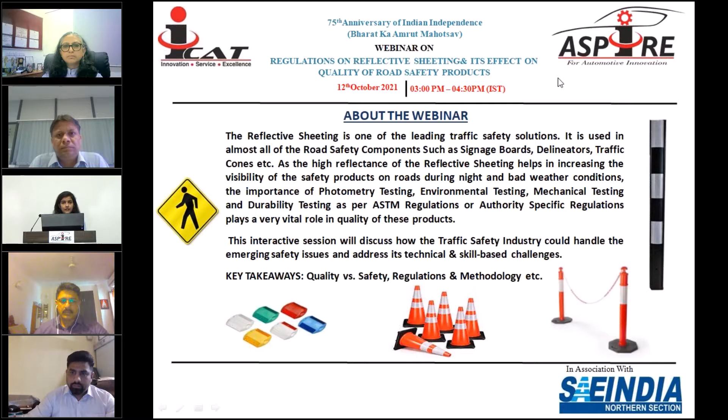Thank you, Astha. Thank you so much. Distinguished speakers, colleagues from the automotive industry, traffic safety industry, ICATians, ladies and gentlemen, a very good afternoon to all of you. It gives me immense pleasure to welcome you on this webinar on regulations on reflective sheeting and its effect on quality of road safety products.

Conventionally, we used to organize physical seminars and conferences, which gave us an opportunity to interact with all the experts and stakeholders in person and share our experiences. But due to COVID-19, virtual connectivity has become the norm of the day, and we have been trying to bridge the gap that the absence of physical presence had brought in through virtual connects. So we are having a series of webinars.

So today's webinar is on a theme which is very pertinent for India and for the Indian population, for road users, as to the regulations on reflective sheetings and their effect on quality of road safety products. We are aware that in financial year 2020, the length of road construction across India was about 24 kilometers a day.

And this has now gone up to being ramped up to 28 kilometers a day. So we have consecutively, continuously increasing construction of roads.

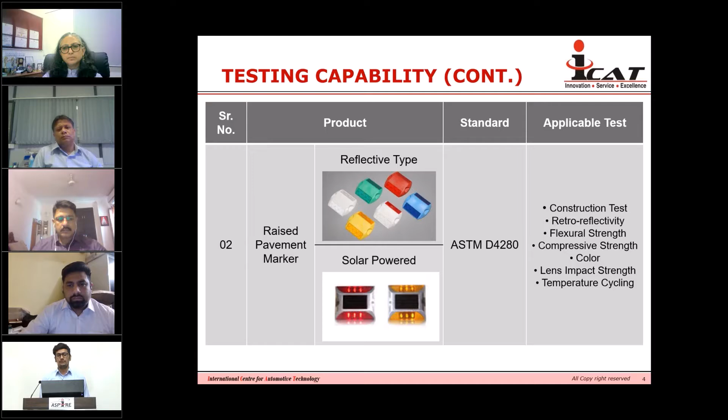The second product is raised pavement marker, RPM, which is of two types: reflective type and solar powered. The standard for this is ASTM D4280, and the applicable tests are retroreflective effectiveness, compressive strength, color, lens impact strength, temperature cycle, etc.

The third one is flexible median marker and delineator. The reference standard for this product is IRC 79, and the various tests as per this standard are dimension test, measurement of reflectivity, powder coating thickness, etc.

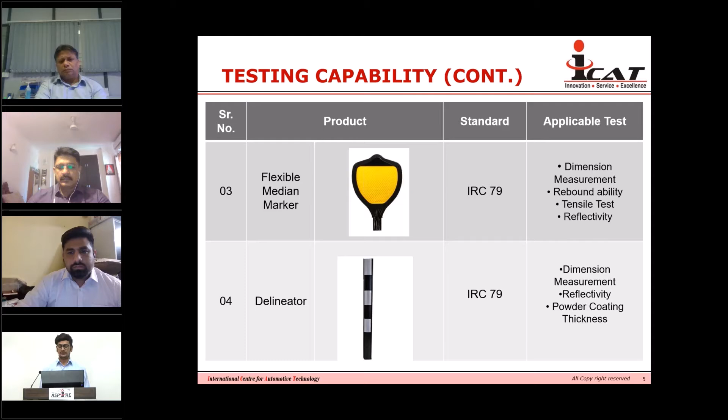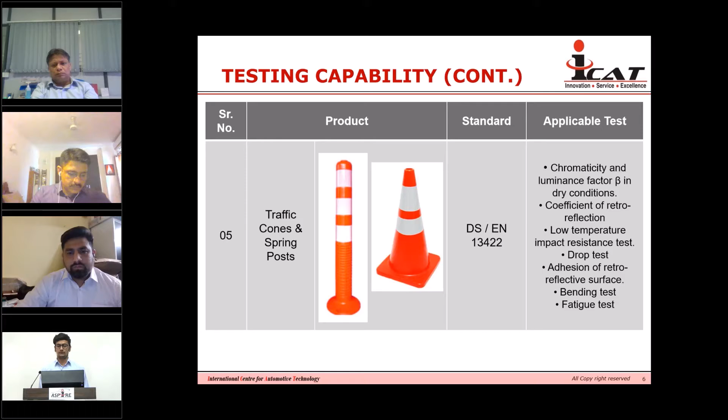The next product is traffic cones and spring posts. The reference standard for this component is EN 13422, and the different tests applicable as per this standard are coefficient of reflection, low temperature, impact resistance, adhesion of retroreflective surface, bending test, fatigue test, etc.

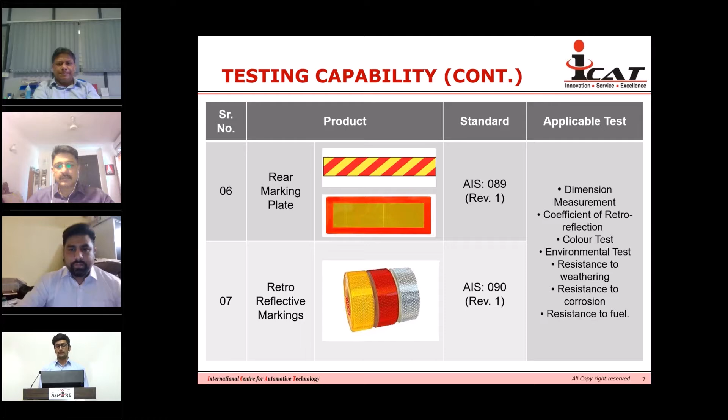We are also capable of testing rear marking plates and retroreflective markings, which are as per standards AIS 089 and AIS 090. The main tests applicable for this standard are dimension test, coefficient of retroreflection, color test, environmental test, resistance to weathering, resistance to corrosion, resistance to fuel, etc.

We are also capable of testing the high security registration plate lamp, which is as per standard AIS 159. The various tests applicable as per this standard are dimension test, coefficient of reflection, color test, resistance to weathering, resistance to corrosion, resistance to water, etc.

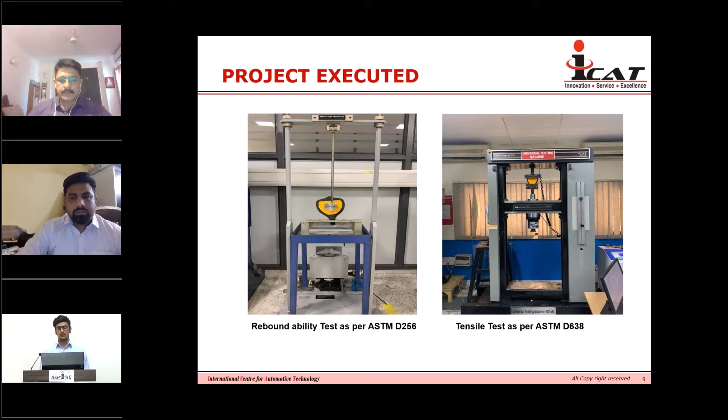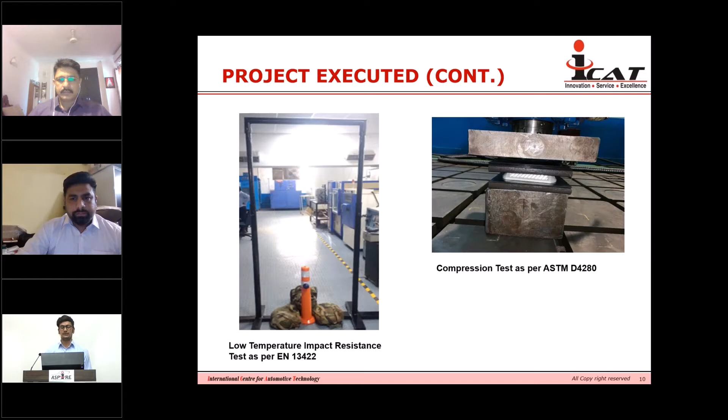We have executed different projects in ICAT. Mainly for road safety products, the various projects we have executed till date are rebound ability test as per ASTM D256, tensile test as per ASTM D638, low temperature impact resistance test as per EN 13422, compression test as per ASTM D4280, and we have also simulated rain condition at different nozzle angles as per customer request.

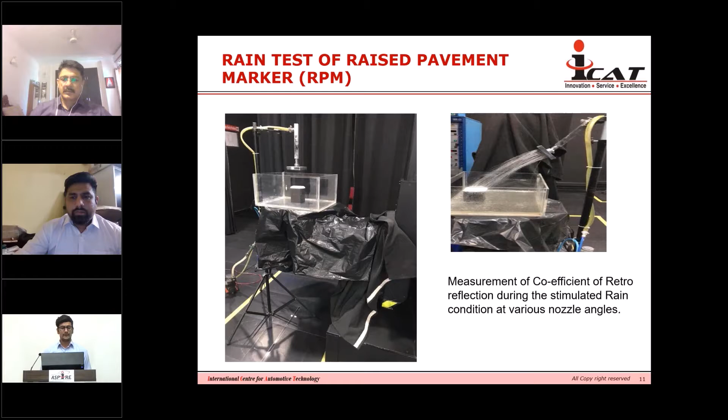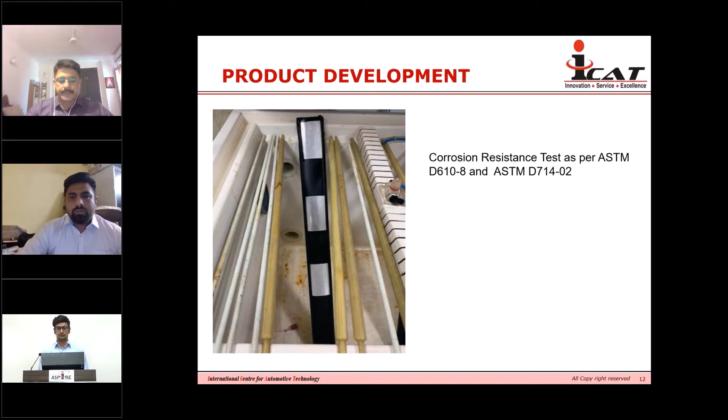We have different capabilities in ICAT Center 1. The main capabilities for the photometry lab are integrating sphere, profile projector—these are used for testing of automotive lamps—and Type C goniometer for general lighting testing.

We also have a setup for transmission and diffusion, and a spectroradiometer for daytime color, for D65, for red content and UV radiation. We have a full facility of Type A goniometer at a 30-meter lab, and we can test as per different automotive Indian standards and European standards for headlamp assembly, rear combination lamp, and all automotive lighting and light signaling devices. Thank you.

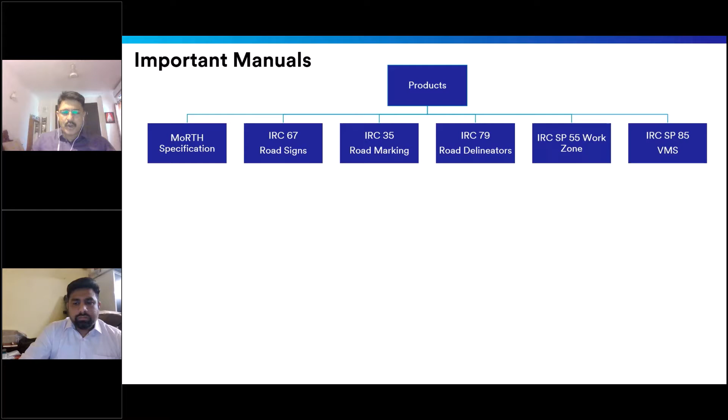IRC has also classified their specifications and regulations based on different road scenarios like 2-lane roads, 4-lane roads, 6-lane roads, and expressways. They have suggested in those manuals what kind of reflective sheeting will be useful in different scenarios. Where there is a high speed expressway, we need the highest grade of sheeting. If it is a low speed road, like 30 kilometers per hour PMGSY roads, that highest brightness reflectivity is not needed. Based on the different road scenarios, IRC has classified the reflective sheetings.

Apart from that, IRC also addresses other important manuals, like Ministry of Road Development specifications, rural development specifications, road safety audit, low cost traffic management in urban areas, pedestrian walkway, and so on. These are the important manuals where reflectivity and regulations are very important.

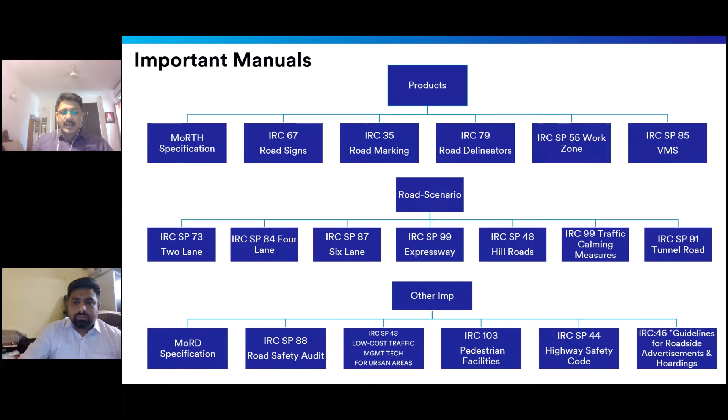Now let's understand a little about the science of retroreflection. This is very important to understand, because the entire sheeting concept is based on this. There are 3 different types of reflections: the first is diffuse reflection, and another we call mirror reflection.

And the third one is retroreflection. First, let's understand what is diffuse reflection. If light is put on any surface, like wood or a floor, it scatters in different directions and does not return back to the same direction. So we call it diffuse reflection.

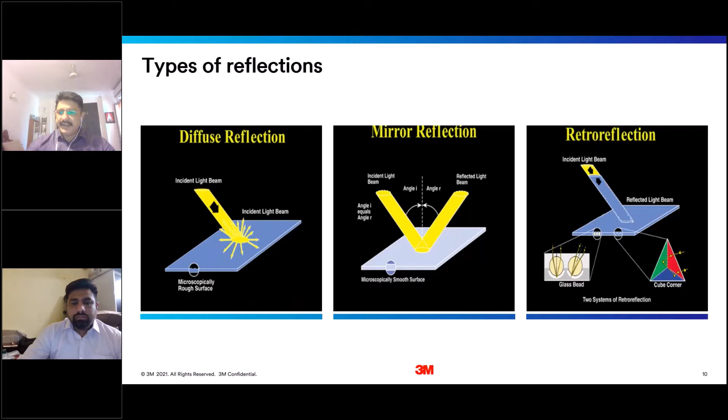So now two important parameters to understand. We already understood the science of reflection. Now, if we see IRC 67, which is the parent document for sheeting, it talks about two different types of angles: one is observation angle and the other is entrance angle.

What is observation angle? Observation angle is the angle formed between the headlight of the vehicle hitting the signboard and returning back to the eyes of the driver. So there is a formation of angle being made, and that is called observation angle.

So these two values keep on changing. It's very dynamic in nature because it depends on the distance our vehicle is traveling and which location it is at, whether the road is bending or turning. So it depends on several parameters. IRC 67 talks about how different types of reflective sheetings perform with different observation angles and entrance angles.

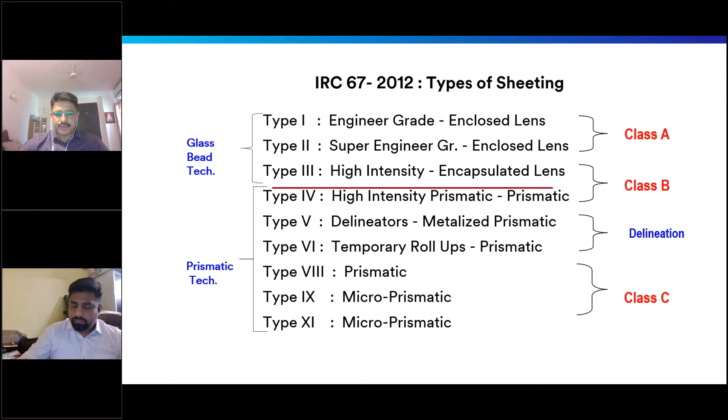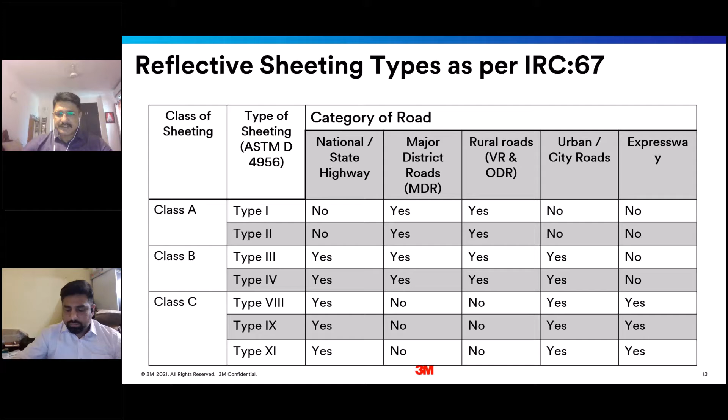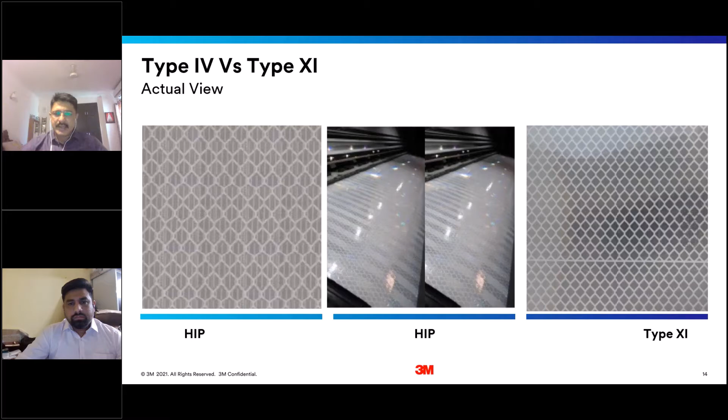And when there is no band, it's a clean sheet where you'll only find honeycombing kind of structures - so it's a type 11. This is just based on actual visibility to the eye. But to identify it properly, you need to use some equipment, called a retroreflectometer. Based on that, one can identify and see the value.

Now another important aspect is quality assurance, how you can assure the quality, because all the reflective sheetings have very long life depending on the type. It starts with 7 years and goes up to 10 years. If it's Type 11, it gets 10 years warranty, and if Type 1 to Type 4, it's a 7 years warranty. So these are a few important things we need to assure whenever any of the sheetings are being used.

When the signboards are being made, we need to ensure that a test certificate is there as per IRC 67. There's a clause given for that. Apart from that, it's very important that there are a few tests done by Indian laboratories, and ICAT is one of the organizations that does such tests. Every manufacturer should provide the different test parameters important to ascertain the life of that product.

Parameters like adhesive properties, shrinkage and flexibility, fungus resistance, impact, day and night color luminance, and the coefficient of retroreflection, and 3-year outdoor weathering. These are the important parameters needed, and it's very clearly mentioned in the IRC 67 clause as well.

So yeah, this is the extract I was talking about, from clause number 6.7 of IRC 67, 2012. You can see here on the fourth line from the top, it's talking about all the tests I showed: shrinkage, flexibility, liner removal.

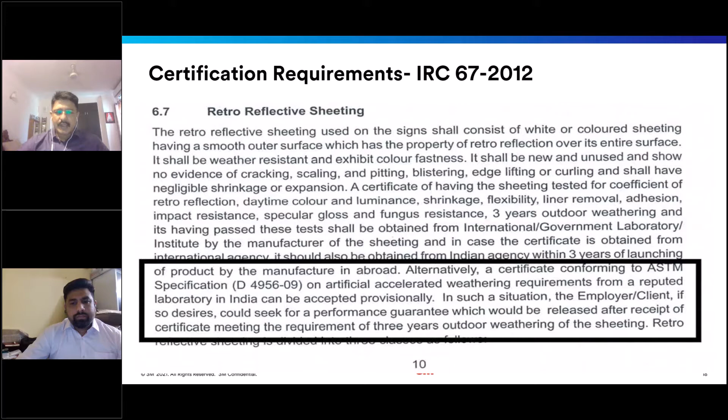Apart from that, it's very important that if any manufacturers are coming into the country, they should have an international test certificate, and within a certain time period, they have to have an Indian test certificate as well. So these are a few important test facilities.

The outdoor weathering is one of the very critical tests, because all reflective sheeting has to perform well in every kind of situation. India is a country where temperature goes up to 60 degrees, and it also goes into minus temperatures, minus 10 kind of temperature. So the sheet has to perform in all weathers, which is why having proper weather conditioning testing is very important.

But it takes some time. The other alternative method is an artificial weathering chamber. Organizations like ICAT have these artificial weathering chambers, where we can simulate how reflective sheetings behave over a 3 year time frame, and replicate it in just 2000 hours.

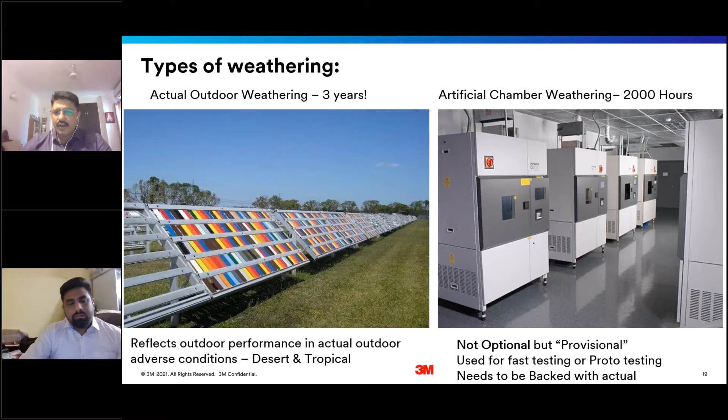Now when you do the testing in the field, it's important to know how the equipment is to be used. We use a very handy handheld reflectometer. There's a certain process: first we need to do the calibration of the product and see if it's properly calibrated and matching the value, then we can go to the site and do the testing. All the parameters given, we need to capture and report into the final report.

So a few important things to remember when you go to the site for testing: make sure the reflectometer is fully charged and calibrated, and the surface should be properly washed with water and cleaned with lint-free cloths. We need to take 3 readings at different locations and take the mean of it, confirming as per ASTM D4956.

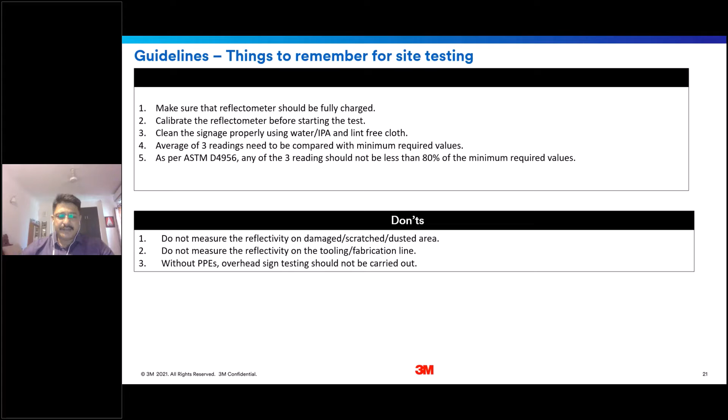Do not take any test data from an area which is damaged or scratched, as it will not give you the proper value. So these are the important parameters to be taken care of.

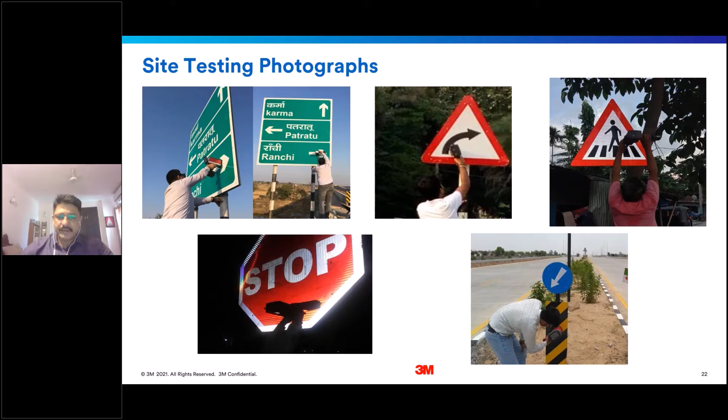These are some pictures showing how field testing can be conducted with the help of a retroreflectometer at the site. Now coming to the road furniture part.

So they start with the first one, IRC 79. IRC 79 covers a few products, starting with the delineator. A delineator is basically made of metal.

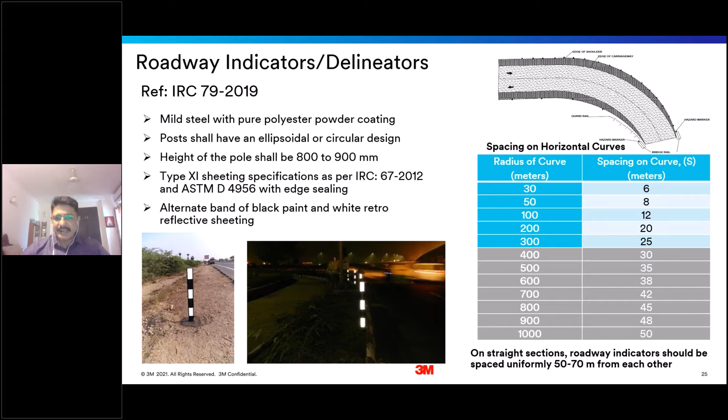It's a mild steel with a pure polyester powder coating. On the top, the shape of this product is ellipsoidal and circular design. Height is 800 to 900 mm from the ground level. The most important part is that it uses type 11 reflective sheeting, the highest grade, with alternative bands of black and white colors. The spacing depends on the curve of the place.

Next, a similar product using flexible type 11 reflective sheeting is called the flexible median marker. It conforms to IRC 79 and uses type 11 fluorescent color reflective sheeting, which is much brighter and visible in bad weather conditions like fog or rain. So long distance visibility is very high for the flexible median marker. It's basically used where there are narrow medians and a lot of accidents happen.

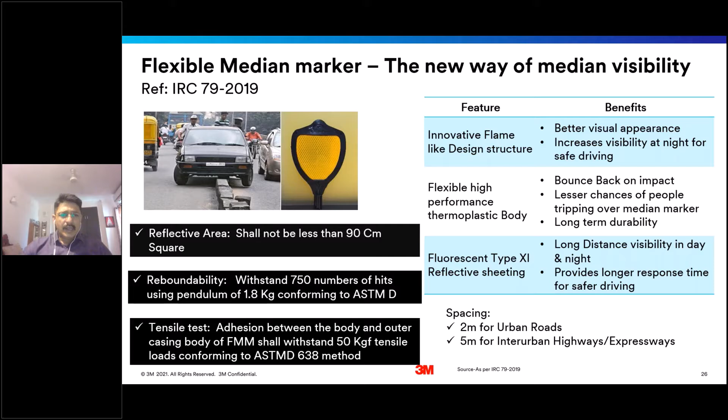Now these are a few pictures you can see here.

Next product is the object marker, which is aluminum flexible prismatic. This reflective sheeting is very flexible in nature and conforms to IRC 79. It uses type 6 sheeting, and on the back it is laminated with aluminum foil. The good part of this product is it can be used on almost all kinds of materials - concrete, metal, trees. It is a self-adhesive product.

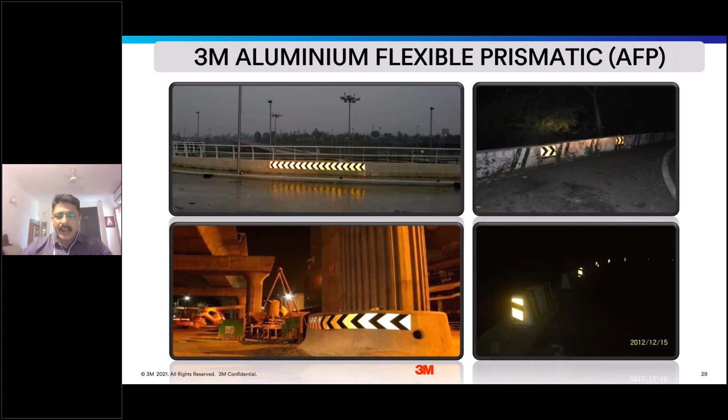Some application areas could be footpaths, roundabouts, median cuts, high masts, and lampposts - critical locations where it can be easily installed to improve safety. These are a few application pictures. In urban city areas, it can be used on metro pillars also, and on some guard sections.

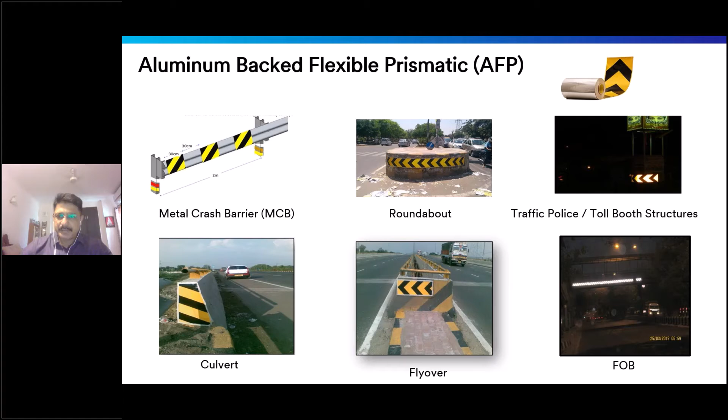These are a few places it can be used - on a crash barrier in hillside areas, where there is a very sharp bend on the road, hairpin bend kind of places - to improve visibility using aluminum flexible prismatic. Some applications are given here.

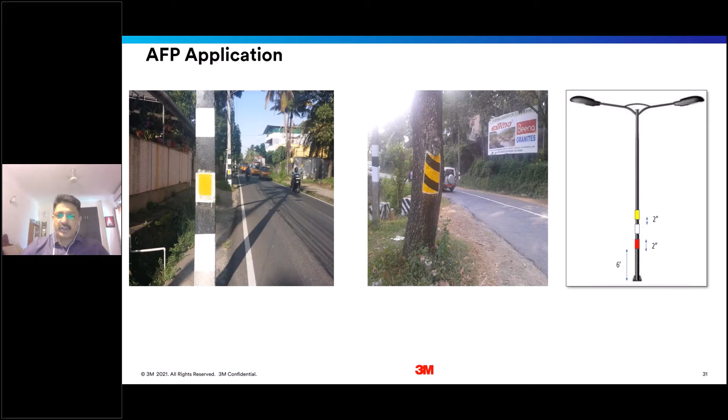Some good applications are when a road is very close and any hazard is very close to the carriageway. Here you can see this electric pole is just close to the road, and this tree is very close to the road. At night there is a high chance the tree is not visible, so we can put reflective sheetings on it, and as a result visibility can be improved. Another application could be putting it on a metal electric pole.

Another new technique of reflective sheeting now available is called digital printing. Earlier the challenge with printing was vandalism of letters from the sheeting, or mismatch of colors - such challenges were there. But now with new techniques we can print the entire thing on the reflective sheeting itself, using any colors.

Now coming to the raised pavement marker - an important product which also uses the science of reflectivity. Instead of sheeting, it uses acrylic based material, which is again highly reflective, and it is used on roads for improving the visibility of traffic lanes. It has different color combinations - red, white, and yellow.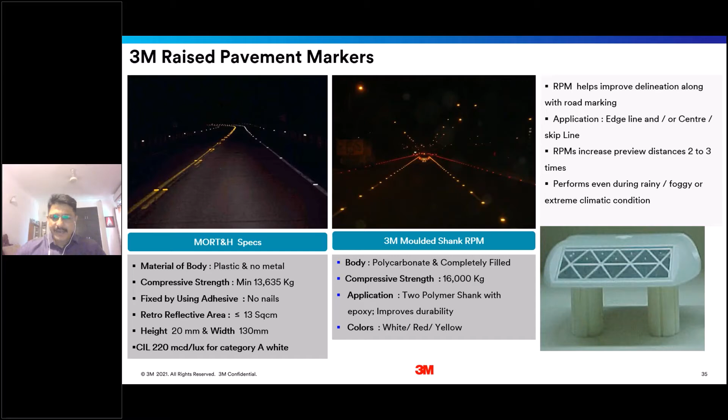Another very important point to understand is where and which locations the color combinations of RPMs are being used. If it is used on the median, we use yellow color. If it is in a traffic lane, we use white color. And if it is on a shoulder side, we use red color. The spacing is based on the type of road where we are using it.

Next important product, which again uses the same reflectivity technology, has both passive and active reflectivity. So it has reflective sheeting as well as an LED lamp inside. It's a solar stud, so it charges in the daytime with sunlight and blinks in the nighttime.

These are the few important locations it can be used, such as exit points, curves, medians, and bridges.

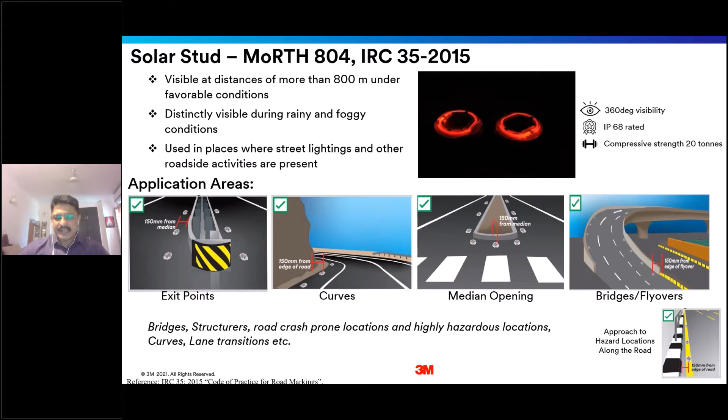Another is the work zone area. Work zone is where construction is going on and traffic movements are there, so again we need to have different measures.

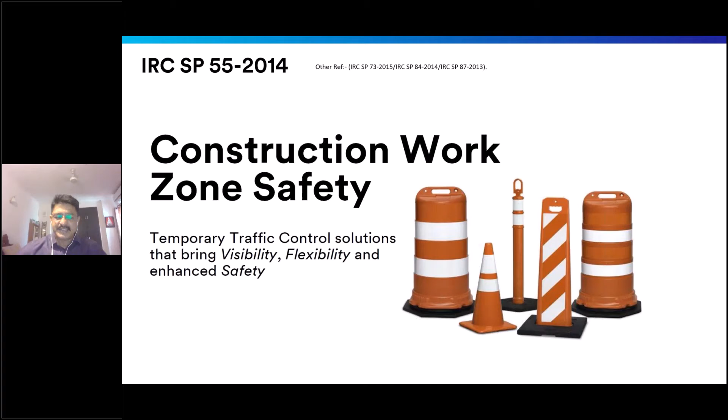Traffic control devices are used in work zones, and two important things to ascertain are that the traffic control devices should be made of plastic, because metal, if used, will be a hazard to vehicles. And it should use a different reflective sheeting - a flexible reflective sheeting conforming to ASTM. It's not the same reflective sheeting used on signboards. These are the few important parameters to understand, and the few products used in work zone areas.

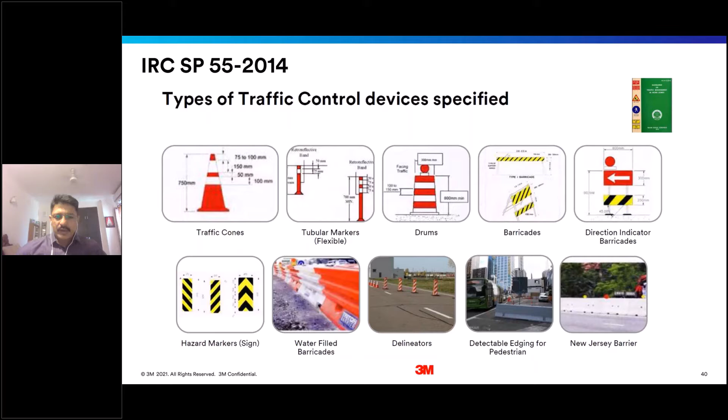Now we talked about the road-related reflective sheetings and their regulations. Vehicle safety is equally important, so I'll cover a few slides related to how we can improve vehicle safety, because vehicles also keep moving on the road.

This slide shows different scenarios we often see while traveling on the road in the winter season, especially in the northwest area, where there is severe fog and visibility is reduced to 10 meters or so. These are the challenges - if some vehicle is parked on the shoulder, without visibility, one can hit it from the back. In the third, extreme right picture, you can see the tail light of the truck is not visible, but the reflective sheeting pasted on it is visible.

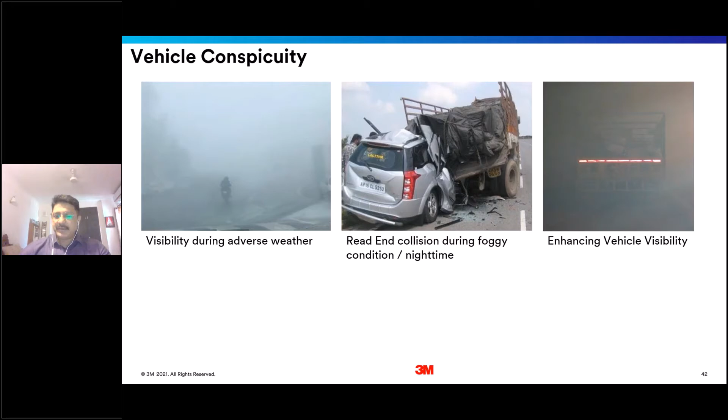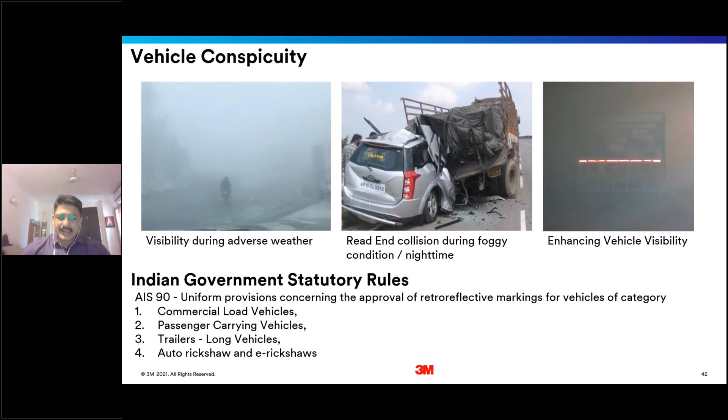So, as per the government, the Ministry of Road Transport brought a regulation we call AIS 90. AIS 90 talks about the use of retroreflective sheetings, or conspicuity tape, in different types of vehicles - commercial load vehicles, passenger carrying vehicles, trailers, auto rickshaws and e-rickshaws. These are the few important regulations which came in the past.

I'll start with conspicuity first. In 2008, the first regulation came related to conspicuity for using these tapes on trucks. But there was a challenge in that regulation - it was talking about vehicles newer than 2009 that could use conspicuity, but vehicles manufactured before that were not covered. So the ministry realized after deliberations that conspicuity tape is equally important for older vehicles.

So in 2019, they revised the circular and came with new regulations stating that irrespective of the date of manufacturing of the vehicle, the conspicuity tape should be used, conforming to the AIS 090 standard. The second one, in the middle, talks about rear marking tapes - this regulation came in 2014 and talks about use of this in long trailer vehicles and trucks. The third regulation came in 2019, related to HSRP, high security registration plates.

These are the three important safety features, and the reflectivity sheetings being suggested by MORTH. If you remember, there are two different widths of reflective sheetings used in the vehicle - one is 20mm width of reflective tape, and another is 50mm width of reflective tape.

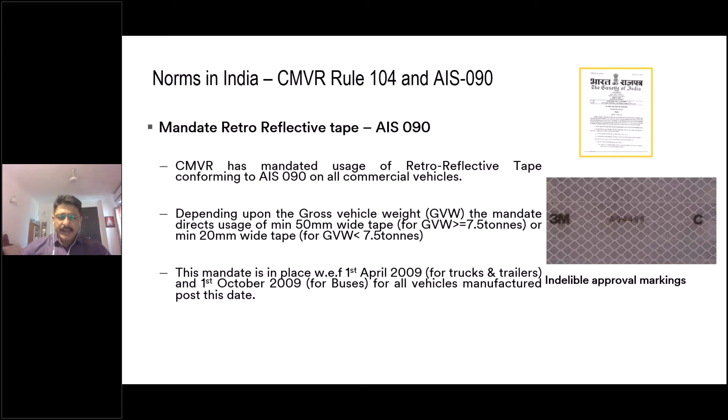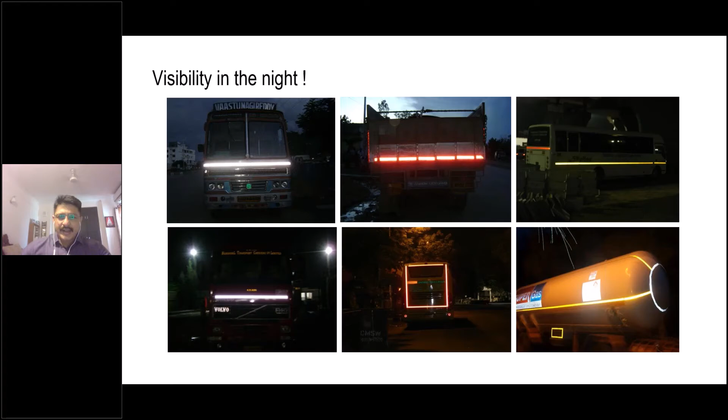Color combinations are also advised as per AIS 90. At the front of the truck, it suggests using white. On the rear, it suggests using red. On the side, it suggests using yellow reflective tapes.

So these are a few innovative ideas apart from trucks. It can also be used on tractors, and new regulations have come talking about using retroreflective tapes, conspicuity tape on three-wheelers and e-rickshaws as well.

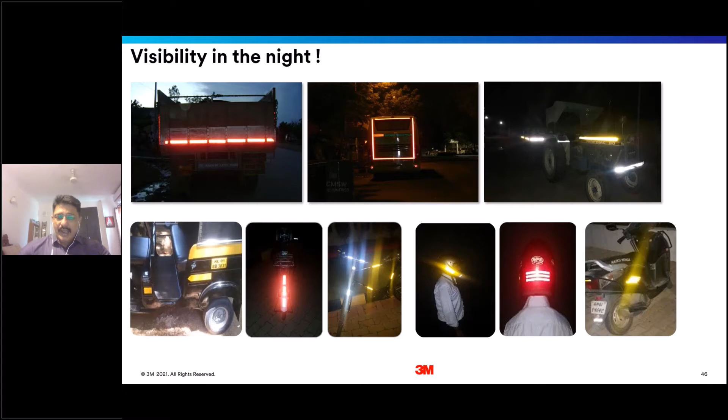But it's very important to consider vulnerable road users like cyclists and motorbikers. If these reflective tapes are used on the bicycle, helmet, scooters, or two-wheelers, their visibility will be drastically improved on the road, and accidents can be avoided. Right, these are a few more pictures you can see here.

So this is my last slide of the presentation deck. This is one study that happened in India and England. In India, the study talks about some low cost solutions, like improving signboard quality, road marking, delineators, studs, all those things.

By using these low cost road interventions on the Mumbai-Pune expressway, which you all know, they were able to reduce casualties by 10 to 25%, using reflective sheetings and reflective devices.

A similar study happened in England. It also talks about low cost products like marking signboards and RPMs. They were able to reduce accidents and casualties by 25 to 40%.

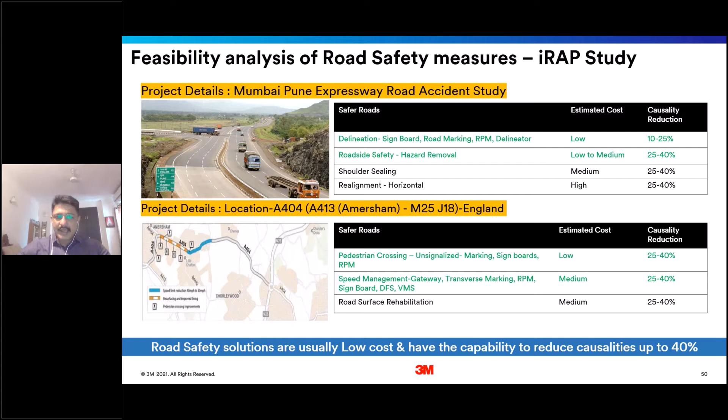So this is how I would like to conclude: reflective sheetings are very important for saving lives and improving visibility at night. Thank you very much for your patient hearing.

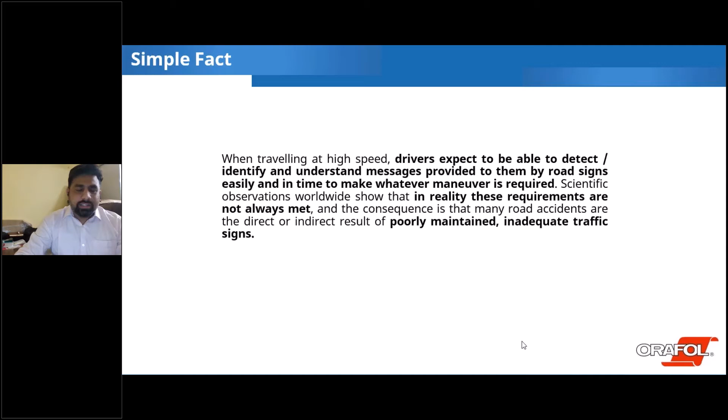As you know, while traveling at high speed, drivers are always expected to understand the messages we provide through traffic road signs, which give drivers sufficient time to react. But in reality, these requirements are not always met. In this program, we will review the current situation and trends, discuss briefly the regulations of IRC and MoRTH, basically the standards of traffic signs, then touch upon the science behind retroreflectivity, and at last summarize with key benefits and recommendations to improve the same.

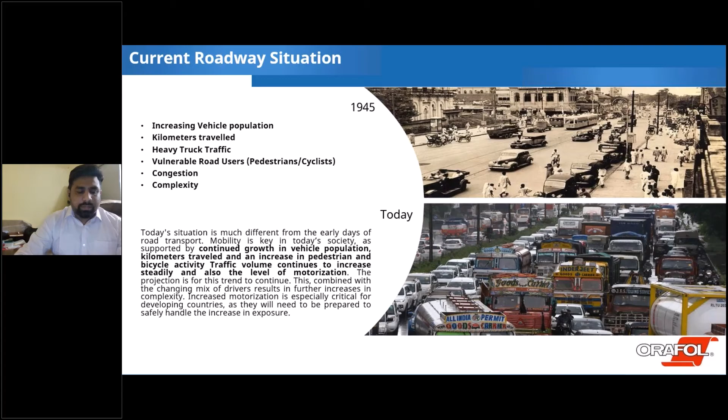So, in a situation like today, roads are much different from early days. Mobility is key in today's society, and accordingly there's an increase in vehicle population and kilometers traveled. There are a large number of heavy truck traffic now present on Indian roads, and pedestrian and cyclist traffic volume continues to rise.

With the changing mix of drivers, complexity is increasing, and in such a scenario one should be prepared to safely handle the same. So this slide gives details about road accidents in India in 2019, sourced from MoRTH, Ministry of Road Transport, from the web portal. You can easily see the accidents that happened in 2019, where major cases took place with two-wheelers, cars, taxis, vans, LMV, and trucks.

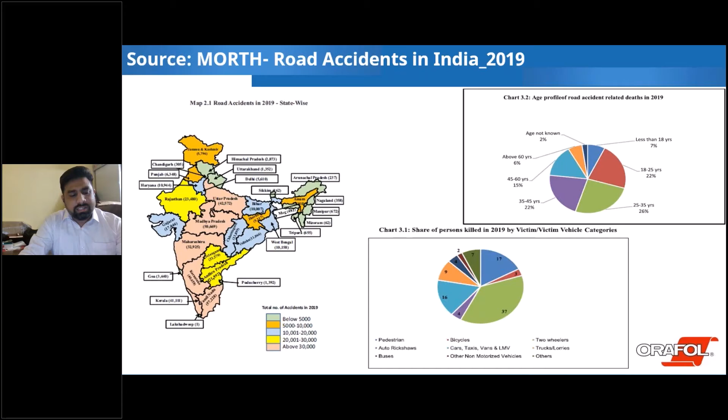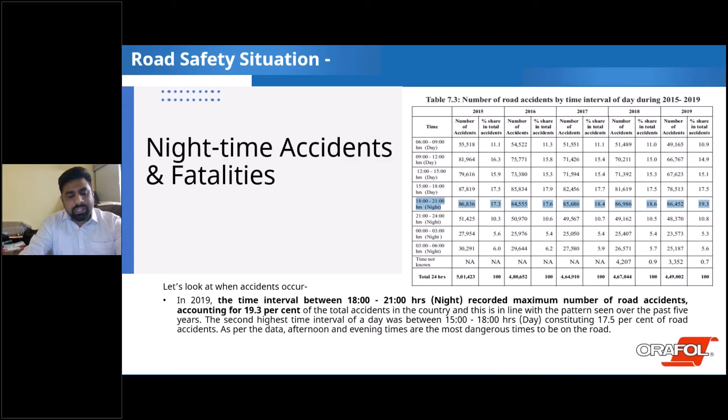So if I'll talk about nighttime accidents and fatalities, this slide shows the fatalities share that took place between 2015 to 2019, and it clearly states that the majority, 19.3% of total accidents, were recorded at night between 6 to 9 hours, which clearly indicates that evening times are the most dangerous times to be on the road.

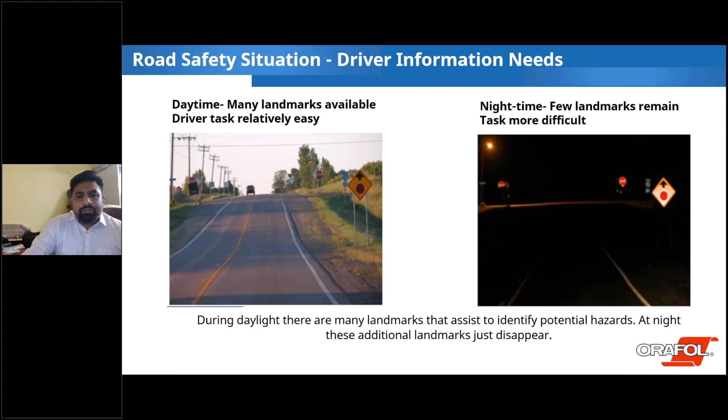If I'll talk about this particular slide, you can see that in daytime, on the left hand side of the picture, there are many landmarks that can assist in identifying potential hazards. But while switching to nighttime, those landmarks just disappear, resulting in no proper visibility of the potential hazards. So if good quality traffic sheeting, reflective sheeting, were implemented on these traffic signboards, it would be properly visible at nighttime. Signs always need to be effective at night as well as during the day, but sometimes these requirements are not always met.

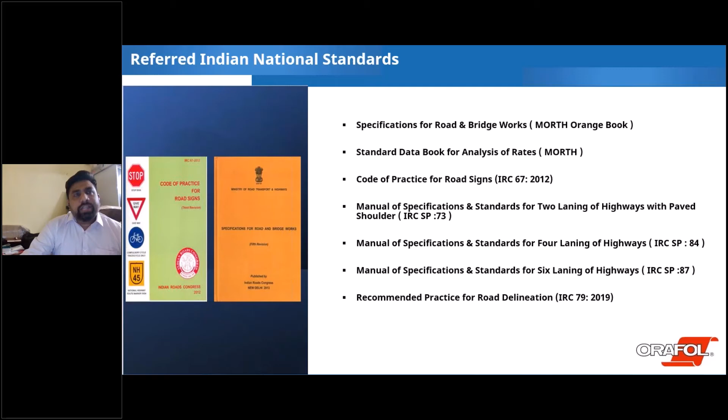So these are the Indian national standards from IRC and from the Ministry of Road Transport that guide you about the code of practices, about what kind of quality, and what kind of signages and sheeting category to be used on the roadways. So we'll talk about the retroreflective sheeting as per IRC 67. One can refer to clause 6.7 of IRC 2012, which clearly states the type of quality and sheeting to be used and what criteria and specs you should go for.

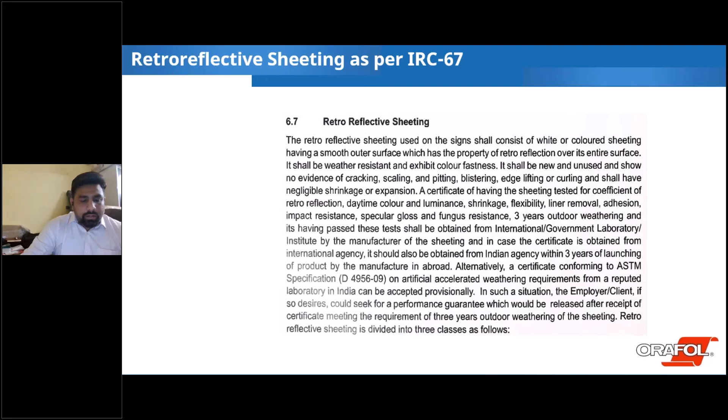If I'll talk about the types of signboards presently used in IRC and Ministry of Road Transport, there are basically three types: cautionary, which you must have seen in triangular shape; the second is mandatory and regulatory, which is mostly circular; and the third is informatory and facility signboards, which you usually find in rectangular shape.

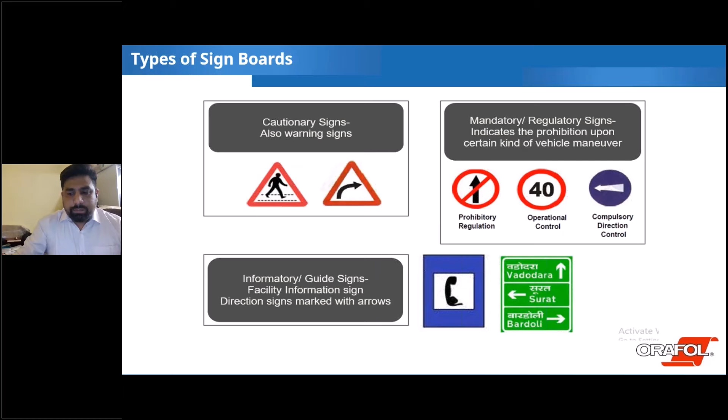There are classes of retroreflective sheeting and uses as per ASTM-D 4956, and there are classes segregated by Indian Road Congress as well. There are type 1 to type 11 sheeting categories as per ASTM-D, and classes A to C categorized in IRC and MoRTH, indicating which category of roads should use which sheeting type. In IRC, there are class A, class B, and class C categorizations for type 1 to type 11 categories of sheeting.

So let's talk about what type of sheetings fall under class A, class B, and class C. In class A, type 1 and type 2 category of sheetings fall. In class B, type 3 and type 4 fall. And in class C, there are type 8, type 9, and type 11, which come under the class C category as per IRC standards and MoRTH.

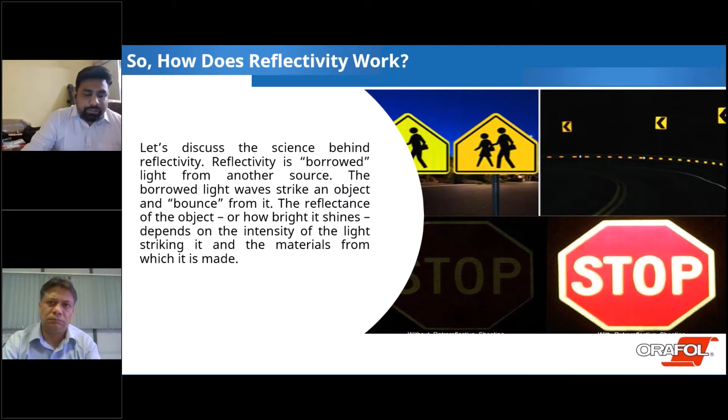So let's talk about how reflectivity works. When the borrowed light strikes an object and bounces from it, how bright it shines depends upon the reflectance of the object and the intensity of the light striking it.

So that is called the mirror reflection. If I talk about the diffuse reflection, what is it called? So when the light strikes rough surfaces, it scatters in all directions.

That is called the diffuse reflection. So if I talk about retroreflection, when a surface returns a portion of the directed light to its source in a parallel direction, that is called retroreflection.

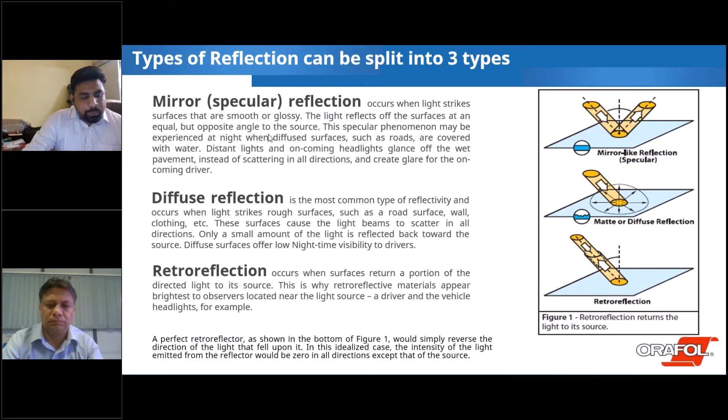From here onwards, we'll talk more about retroreflection technology, which will give you a brief idea of what kind of technology we are actually implementing on our reflective sheetings and what we are using on our traffic signs these days.

There are basically three types of technology in retroreflective sheeting. The first one is the enclosed and encapsulated glass bead sheeting. The second one is the micro truncated cube corners, and the third one is the micro full cube corner prismatic sheeting.

If I talk more about the enclosed type, this has limitations, and only 28% of the surface area will return light just right. The rest, 72% of the surface, is basically of no use, and it is scattered.

If I talk about the micro truncated cube, this also has limitations, and only 65% of the surface area is active while returning light just right. The rest is of no use and is scattered. Light entering the cubes here only reflects twice and therefore is not returned to the source.

So what is a micro full cube? This uses mirror reflection, and since there are no dead corners, it uses 3-bounce mirror reflection, and hence 100% of the surface is reflected.

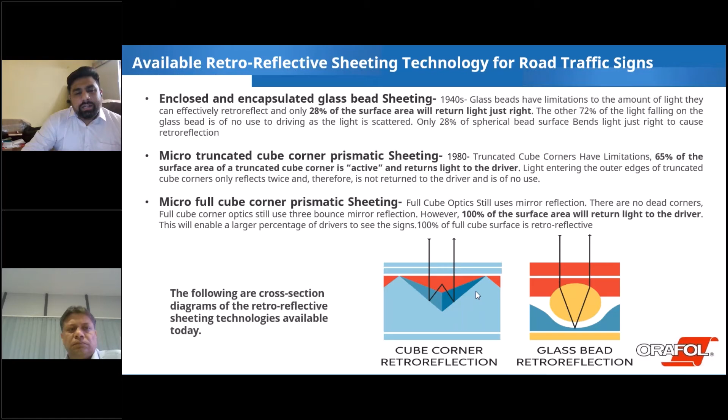So if I talk about the light return in cone pattern, how does it happen? Basically, retroreflective light, when the incident light from the source strikes the retroreflective device, it always returns in a cone back towards the direction of the light source, and this cone helps in visibility of these areas on highways or roads.

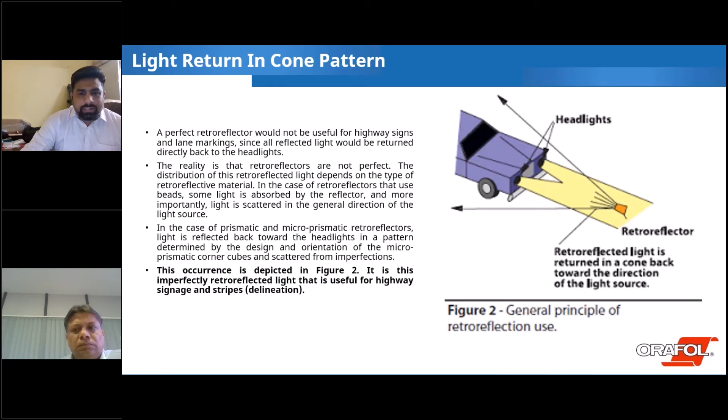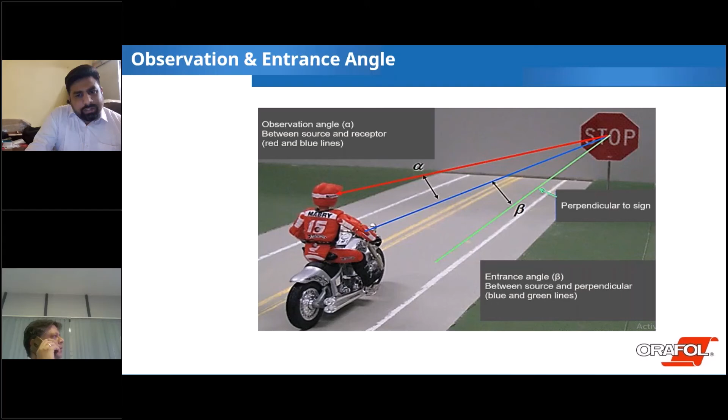So when the observation angle increases, the sign will appear less bright, and this will increase every second as the driver approaches the sign.

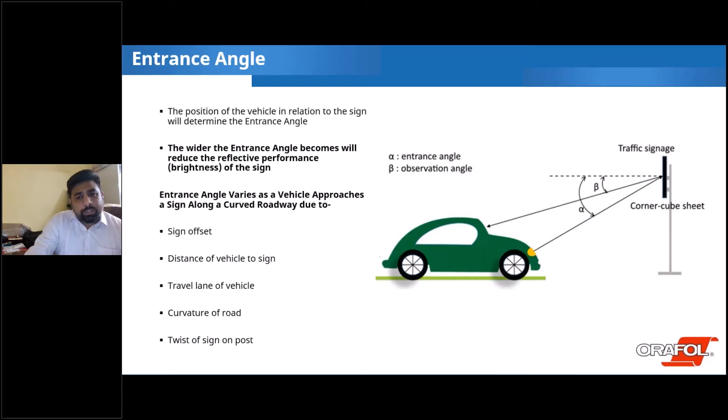If I talk more about entrance angle, in the same way, when the entrance angle is wider, the reflective performance will be reduced. It depends upon various factors like sign offset, distance of vehicle to the sign and to the roadway, travel lane of vehicles, curvature of roads, and twist of sign on post, which plays a vital role in getting the entrance angle in terms of reflectivity for that particular category of sheeting.

So what are the available technologies, and how has light return technology improved these days? If I talk about traffic signs, retroreflective properties play the deciding role in the nighttime performance for the driver. Here, it's the percentage of the amount of incident light received when striking the surface.

So if I show you engineering grade sheeting, this is based on glass bead technology, which only gives back approximately 8%, and that falls in the class A category of sheetings.

If I talk about the high intensity beaded returns, this is again glass bead technology which only returns 14% of the reflectivity to the source, and that falls into the class B category.

The third one is the truncated prismatic grade sheeting, which has only 65% of the reflective surface, and it returns only 30% to the source. So truncated prismatic grade sheeting is about 4 times more efficient than engineering grade glass bead technology, and twice as efficient as class B category.

And the fourth one, which is the most efficient and most effective, full cube prismatic grade sheeting, returns about 58% of the incident light, twice as efficient as truncated cube corner, which falls into class C category, and has 100% active area in terms of reflectivity.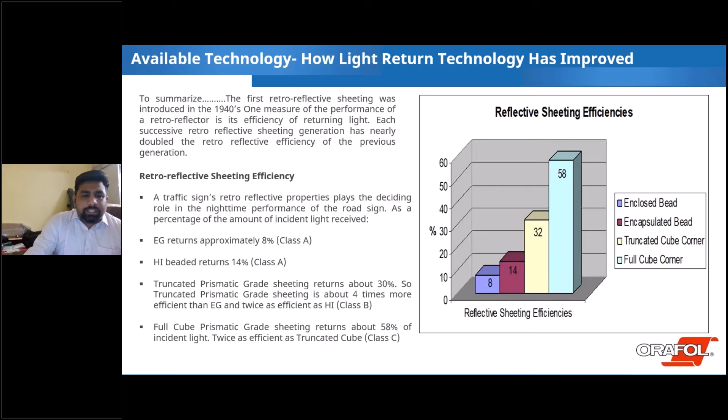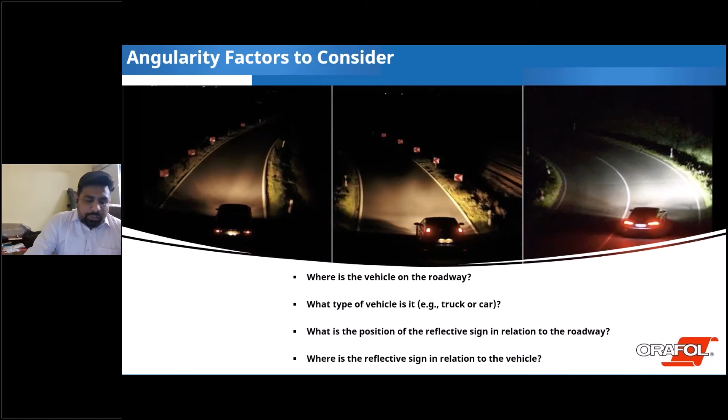So there are a few angularity factors to be considered when a vehicle is on the road, comparing the observation angle and entrance angle with the signboards implemented on the road. So there is where the vehicle is on the road, what type of vehicle you are driving, and what is the position of the reflective sign in relation to the roadway and to the vehicle. These are the important angularity factors to be considered.

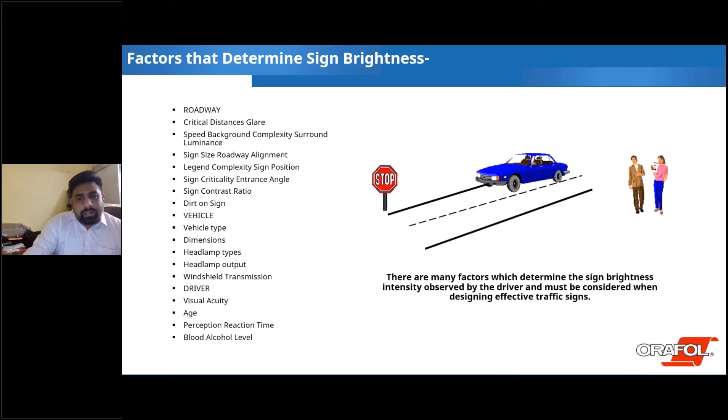So why are brighter signs basically required? We'll look at some trends in transportation that affect sign performance requirements. There are basically three points we've considered here which give you an idea of why brighter signs are required depending on the roadways.

The first one is the aging population. The second is the growing truck fleet. The third is visually optically aimable headlamps, that is VOA headlights, which most OEMs are now adopting in their automobiles.

Let's start with the first point, the aging population, older drivers. Studies show that the required light need doubles every 13 years after the age of 20. There is deteriorating vision starting in middle age, which increases risk for accidents in low light conditions. Efficient and effective signs can help give visibility even from long distances and in low light due to their wider angle visibility.

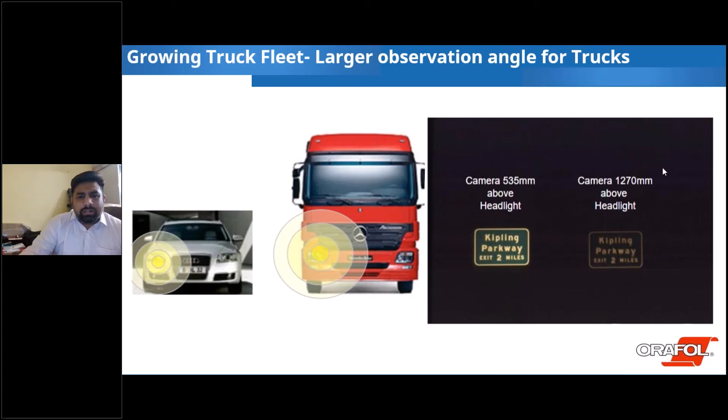So the third point is visually optically aimable headlights. Due to the subsequent change in headlamps, most OEMs are using VOA headlights these days, which only focus straight ahead. Due to the diminishing light supply from VOA headlights, along with an aging population, greater reflection from sign sheeting is required to increase the return light to the driver, which is crucial in minimizing eyes-off-the-road time. That's the reason why brighter signs are required, which provide superior performance at disadvantaged angles and difficult sign positions.

It depends on what type of sheeting you're placing on these signboards, and what is actually approved by the IRC and MORTH in India. If you apply the class A sheeting, you can have only 8% of light return. With class B prismatic sheeting, you will only have 32% reflectivity. Once you apply the class C category, which is the most effective and efficient, type 11 sheeting, you will have 58% reflectivity out of those boards.

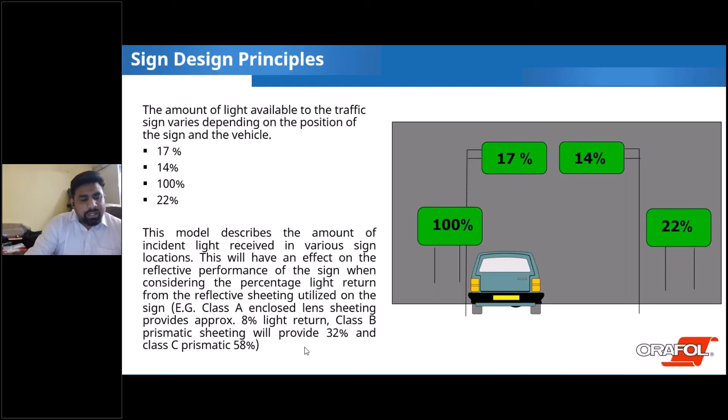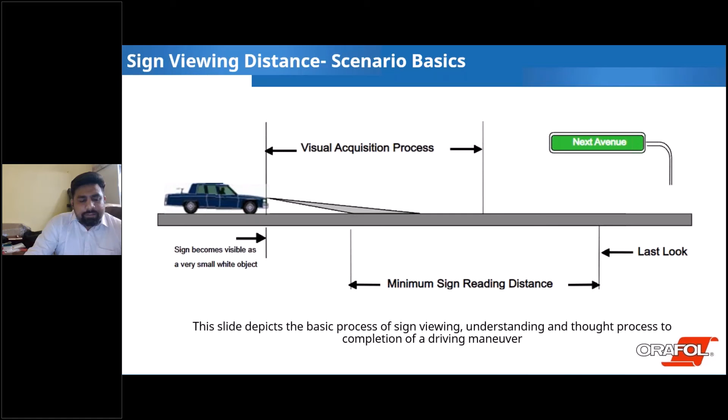This picture gives a scenario of sign viewing. This slide shows that a vehicle has to come closer to get visibility of the signs. Hence, if you provide the high efficient full cube corner sheets, the driver will have visibility from long distances and sufficient time to react.

A vehicle driver has to come close to the signboards to see what is written. With class B category, class C still has longer distance visibility. That's why brighter signs are required, because all age groups of people travel on the roadways, and they need more light related to their age. If the driver is old, they need more light and brighter signboards so they can see from long distances and react within sufficient time.

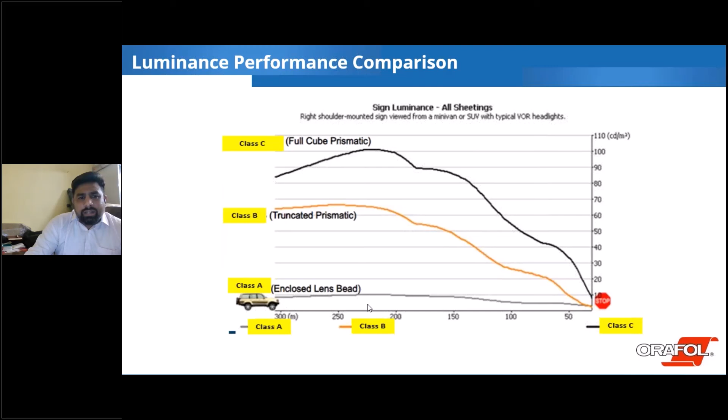There is also a new technology approved by the Indian Road Congress and Ministry of Road Transport, the fluorescent sheeting technology, which provides improved daytime color and low light performance of signs during dusk, dawn, misty conditions. The fluorescent color increases daytime sign visibility as well.

The second property of fluorescent sheeting is that it allows them to take some light energy that would normally be absorbed and not seen, and re-radiate it as longer wavelength. This fluorescent technology is already approved by the Indian Road Congress and Ministry of Transport, which suggests you can always implement fluorescent color in the daylight on the roadways for better visibility in daylight and night time, since it helps in dusk and misty weather where there is fog and low visibility. Fluorescent sheeting will always help in getting early visibility of the road.

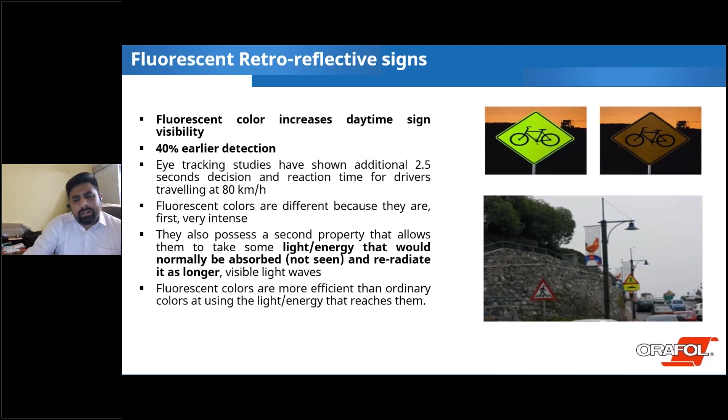So I'll talk about if somebody has to upgrade to type 11, the class C category, in their estimates, then what are the components of the road traffic sign and what are the cost variables that have to be considered.

On the right hand side, you can see a picture of the components of a road traffic sign. For cost-effective signs, there are few components like reflective sheeting, sign backing, sign manufacturing labor cost, sign post, and sign installation cost. Everything remains the same, only the type of sheeting varies. Hence there is not much variation in the cost of the contract.

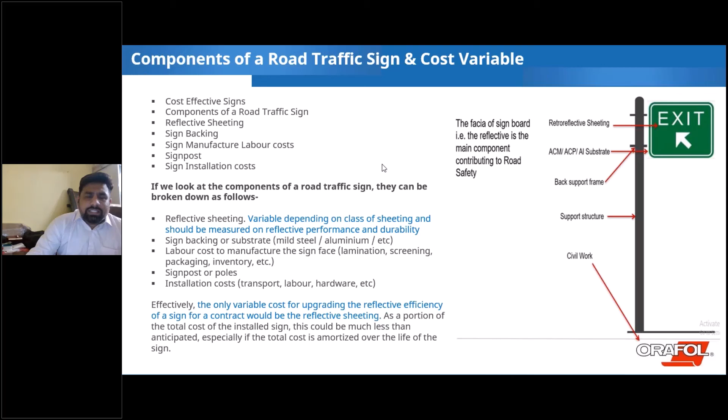When you consider the class C category of sheeting for your signboards while preparing estimates for your roadway or any road stretches, your cost variable would not go up, because it is only the front fascia of reflective sheeting as per the design element you are changing, and every other component remains the same. So it will not give much impact while creating the contract or estimate.

So to summarize, here are some key points to remember. Developed roadway infrastructure is needed for road safety, and effective traffic signs are a key part of this. High brightness signs, day and night, are used to improve roadway safety, and they are cost effective. The distances at which brightness is provided are important, critical distances.

There are truck drivers and older drivers also on the roads, who need signs which provide more brightness, especially at high observation angles. And there is daytime brightness of signs, which can also be increased by using fluorescent reflective sheeting.

This is the most important point: daytime and nighttime reflectivity may be increased by using more efficient prismatic full cube type 11 sheeting technology, because it has maximum luminance. Type 11 sheeting returns nearly twice the amount of light as type 4, and type 11 is 100% efficient full cube technology. It helps in the case of diminishing light supply from older headlamps, along with an aging population.

The aging population requires greater reflection from sign sheeting to increase the return light to the driver. That's the reason this high category of sheeting, or effective sheeting category, is required.

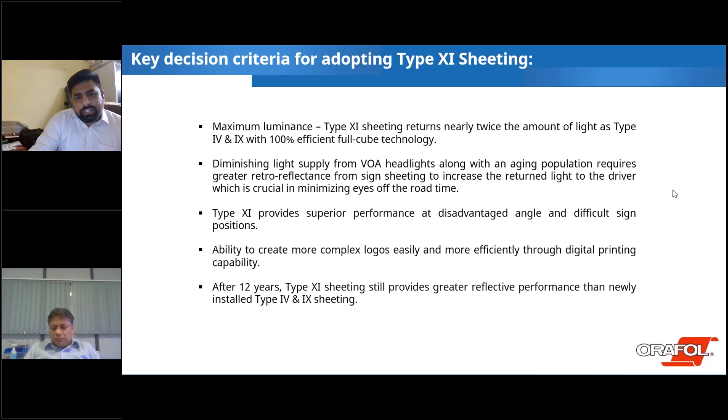I'll talk about the Orafol company. Orafol is one of the world's leading manufacturers of innovative self-adhesive graphic films, reflective materials, and adhesive tape systems. The International Orafol Group was founded in 1808, and it is headquartered just outside the city gates of Berlin in Oranienburg, and it is almost 213 years old.

If I talk about the reflective solutions division, here are the few product lines which we basically cater to in this division: permanent traffic signs, construction zone materials, vehicle conspicuity, car license plates, personal safety, safety at sea, and industrial marking tapes.

So this is all from our end, and thanks to the ICAT team for inviting me to present on the reflective sheeting criteria and the technical aspects. Thank you so much.

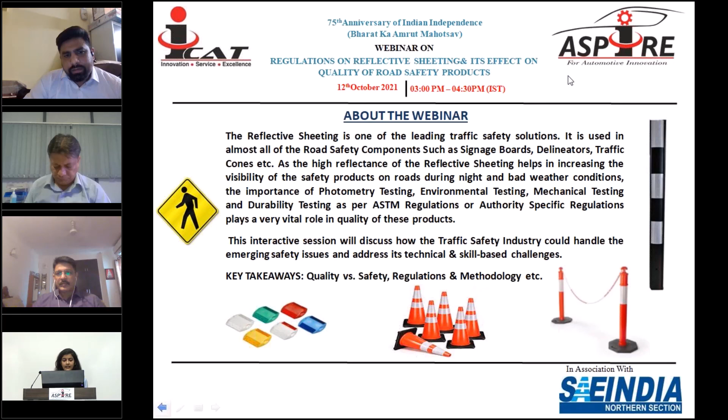Good afternoon. I would be very thankful to the speakers from 3M, Mr. Swatendra Kumar, and Mr. Amarendra Singh from Orafol. ICAT has been providing the service of photometry testing validation to the industry since 2006 when we started this laboratory, and ever since that time we have been trying to provide value-added services to our customers. However, our interaction with companies providing road safety products has not been so old, because we started recently with 3M, Orafol and other competitors.

But now we are working very closely with the Indian Road Congress and also with the Ministry of Transport, and soon we will also interact with the National Highway Authority of India, IHMCL also, where we are trying to provide inputs for setting up guidelines for validation of road safety products, especially these retroreflective tapes and other products going into automotives, and also to identify benchmark test houses who should be authorized to issue compliance for such products. The validation and certification process should not be diluted in any way, because it is related to road safety.